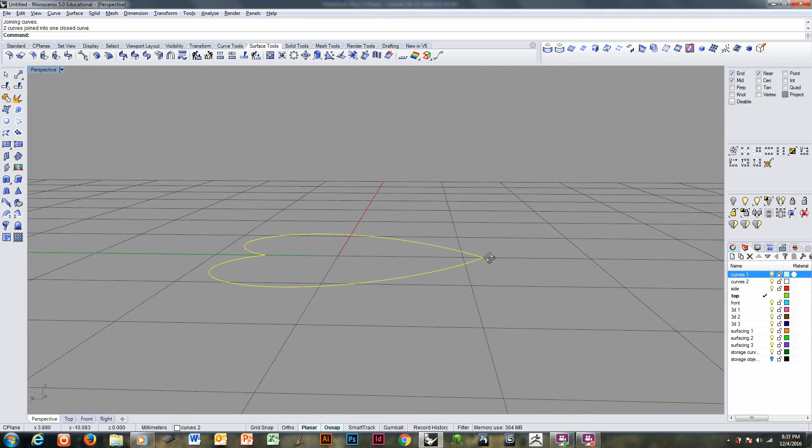We've been talking about doing organic modeling with a top and sides approach. I'm going to show you an approach to doing a puffed heart, something that is notoriously difficult to achieve well in Rhino.

Here's a basic drawing of a heart. I'm going to break this drawing down so that I have two rails that I can use to make a surface that I can then modify as the top part of this heart. But before I do that, I need to draw a front and side view of what I want. It's always wise to do.

The easiest way to get an accurate construction line here would be to do a line tangent to two curves. I could just mirror that, but might as well come over here and do it this way, and then one to the right here, with the same approach.

For a bottom construction line, I can just pull off the points of the heart. These will allow me to draw a top and side view, the end and side view of my heart.

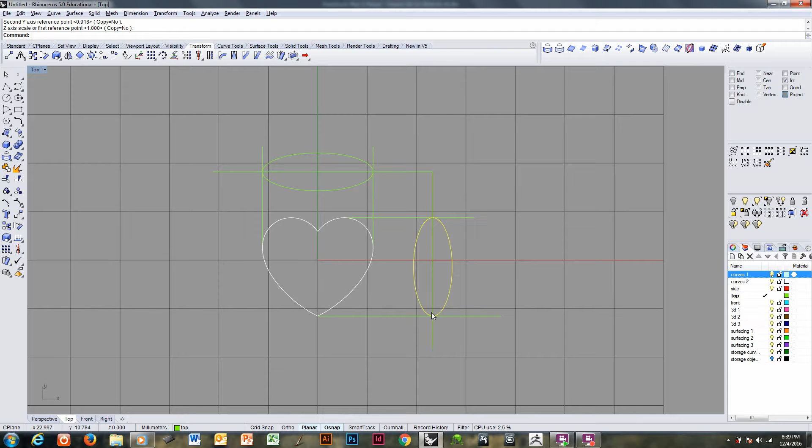So I will move that view into position and rotate it appropriately, and same thing here. Actually, I'll just rotate it where it is, and then I'll project it to the front C-plane. Front C-plane, project. There. So I have my front view and my side view.

I'll add a little more information to that as I go along, but for now that'll do. Go ahead and turn those views off. I want to copy this, paste it, and put it on my storage layer in case I need to get that exact pristine heart back later.

Now I'm going to chop this up a bit. I want to take this curve as far as I can, but once I get much beyond here, if you can picture this extending, I start to come back into a point very quickly. So that's about as far as I can go.

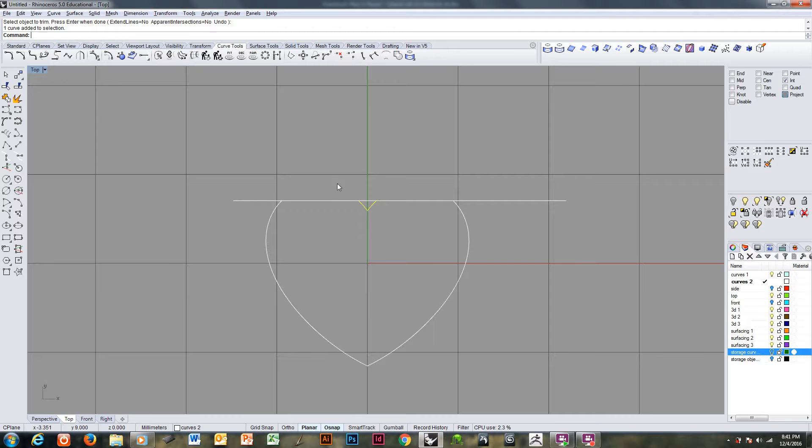So I'll copy this again. I'm going to trim this off, and then I'll move this down to the point. That's a pretty good position for the point. I'll trim the point off.

I'm going to paste that drawing back in, going to extend by arc to point. Just something up this direction is fine. Going to rebuild this curve. I'd say 24 points would be fine.

Mirror it over. I don't need this to go really much beyond the end of the heart, so I'll trim those off. There. Okay, this is the curve for my surface. Those are the curves for my surfacing work.

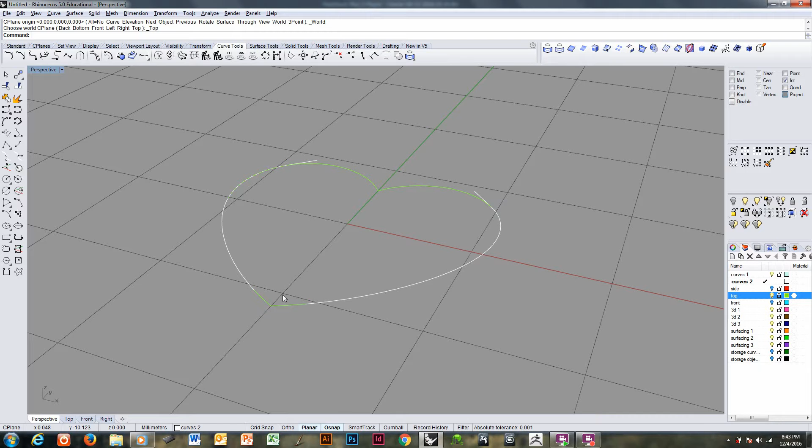Now I mentioned that I might need to do more in terms of the views. As a heart comes down to a point, you have a cleft here and a point here. These are really important to the nature of a heart. And wherever you have a point in a 3D model, in a view, you have a crease.

This is going to be a puffed heart. I'd like to have as little creasing as possible. So when you think of a point in three-dimensional form, if you don't want to crease, you basically have to create a cone. Think of a stone pavilion, okay?

Think of this as being the front view of a faceted stone's pavilion here. Here would be your girdle, here would be your crown, okay? That would be your girdle, okay? That culet can come down to a nice point.

If, however, this is an emerald cut stone, okay, so you have a lengthwise extension here, you can't have a point anymore. That's why emerald cuts have a linear culet at the bottom of them, like this.

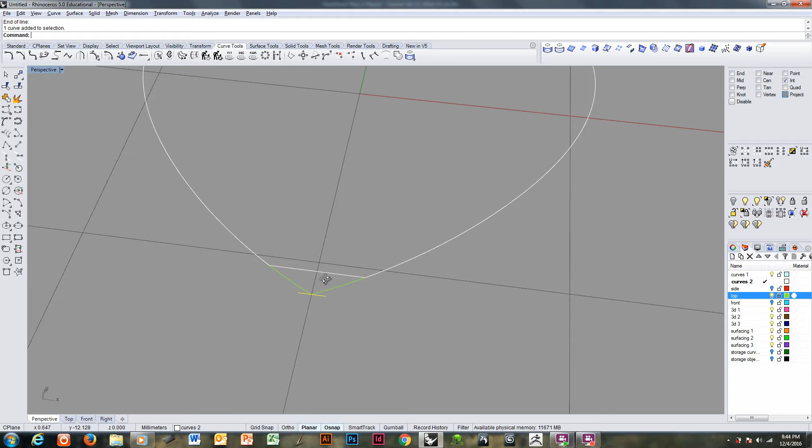Okay, so for us to be able to come down to a natural point, we're going to want a circle or something very close to a circle as a cross-section on our heart here. So I will draw that now.

Okay, so by the time I come down to the end of my heart, at this point I want to have a cross-section, something like that. I can have more of an oval, because as you know you can pull an oval cross-section also down to a point.

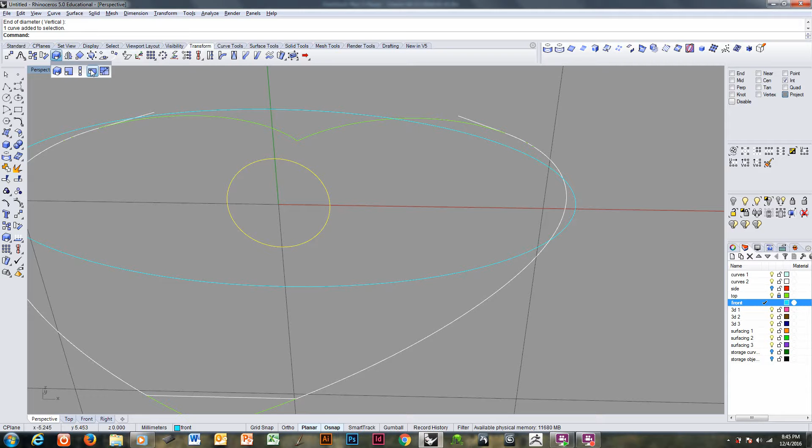But it can't be cushioned, it can't be squared at all. I'm going to go ahead and do a non-uniform scale of this, with a copy option being yes. If I make it like this, I'm not going to be able to pull to a point, it's going to be a crease. That would be about the most I could do in an oval that would not give me a crease at the bottom. So I'll leave both of those curves there as reference in my front view.

And I'm ready now to surface. I don't need to do a bi-rail sweep in this case because these two flat curves side by side are going to give me straight sections no matter what I do. Like so.

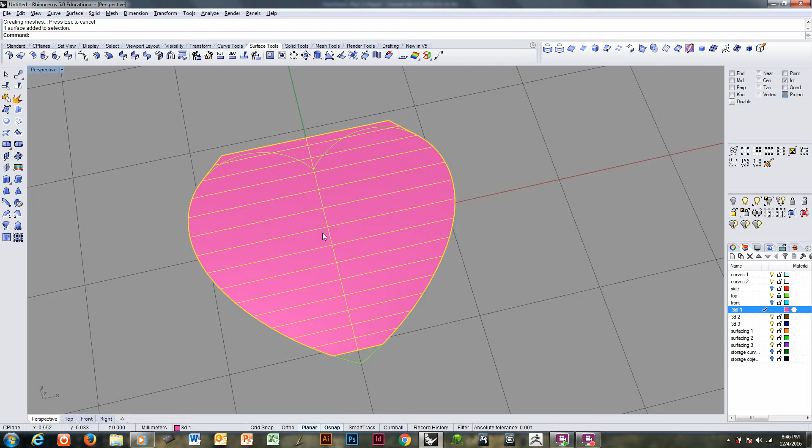I want to rebuild that so that it's a good surface for me to sculpt with. Right now it has 18 going in this direction. I can tell because it's the larger number, it's certainly not the 4, it's the 18. 16 should be good.

7 across the top, yeah, that's fine. 7 going this way, always want an odd number so that I have a center line. 3 is a good degree of mathematics here in the surface. Like I said before, I prefer 4 for curves, but Rhino's standard of 3 for surfaces is fine.

And that's the surface I'm going to sculpt with. At this point, I'm going to go ahead and turn off that green layer for a moment and start to sculpt. I'm going to begin in the front view, no real reason why, just as easy as not. Going to move this piece up to the front view.

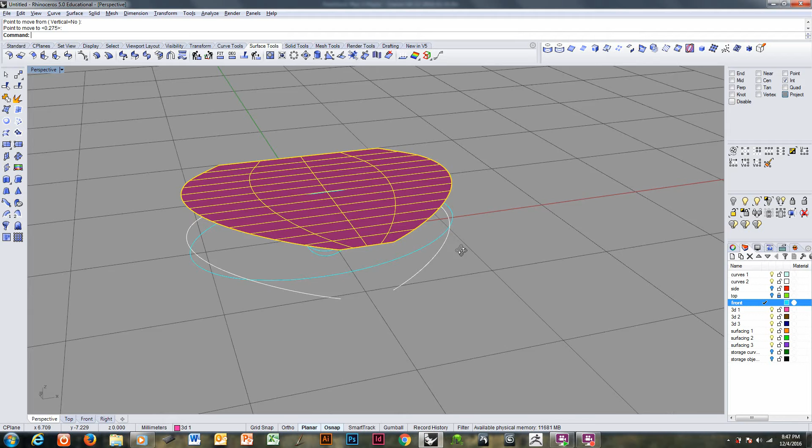Till it approximates that oval. I don't have to be precise. Turn on the points and begin to sculpt. I have this set up for point editing over here, so I do have my object snaps on top, and my point selection and visibility toolbars below that, and my layers and properties panel below that.

I'm going to go ahead and select everything but the center line here, and hit the wrong direction. It's always the first time to figure out which way Rhino's decided to throw these points. That way's fine. And I'm going to move down.

Okay, first thing you're going to notice is that the whole surface pulls away from my curve. That's fine, I'm not concerned at this point with that.

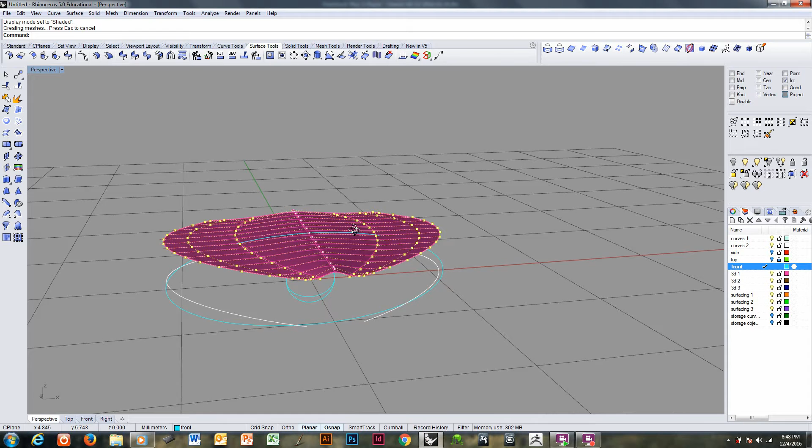Going to grab the outside 2 rows of points, do the same thing with them. And I'm just trying to keep my surface somewhat parallel to what's going on here. Last outside row by itself. Okay, I don't want to go crazy. This is fine.

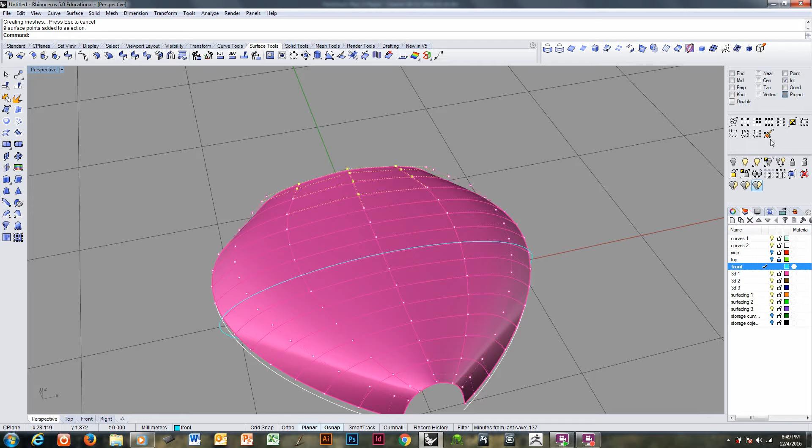And now I'm going to bring some of the other point information up again, mainly these center 3 rows. Just to get an outline that is pretty much consistent. I'm not being crazy about it, I'm just gesturing it in. Okay?

So I've created something that approximates that view from the front.

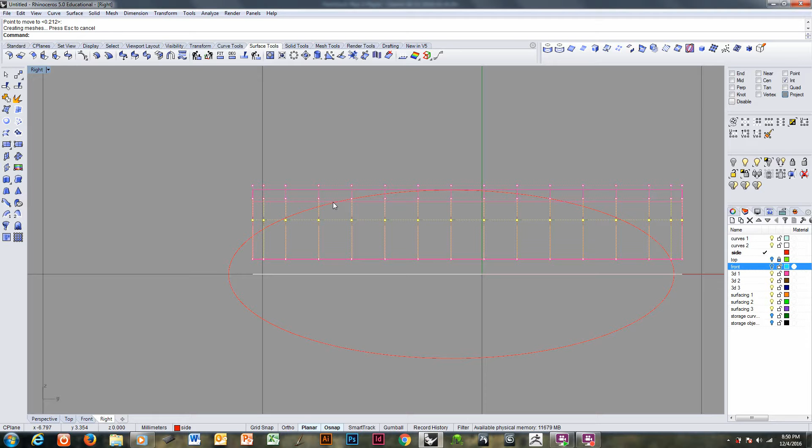Now, my right view is going to be hard to see. When I go into the right view, if I stay in point editing, it's fine. But if I go shaded, that curve is going to disappear.

Since I know I'm viewing it from the right, I'm going to move this curve with grid snap out beyond my model so that it will... okay, other side, that's fine. I moved it the wrong direction. So that it remains visible to me. That's right, I'm looking from the right, so there. So it remains visible no matter what.

Then I'll lock it and start manipulating control points from this side. Actually, I'll do one side at a time. This is the row that's already pretty much at the top.

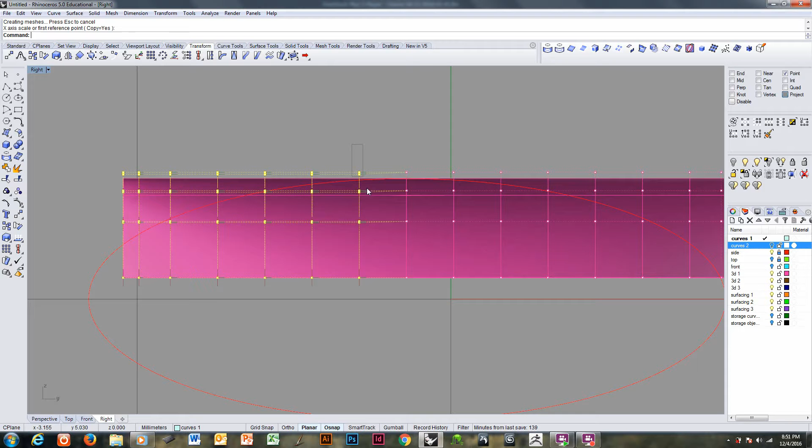And I have 2 choices. I can either move these down, but I want to keep the bottom line straight. So what I'm going to do instead is non-uniform scale, always picking at the bottom point, or 0 - either one would be fine. I don't want grid snap anymore. I don't want copy yes anymore as an option, so I'm going to remove that right away.

And it will take a few passes, because remember what you're doing here - these points are magnets, the surface doesn't pass right through the points. So I'll come all the way through, approximate it from what I can see, and then come back and try to be more precise. And it really doesn't take very long.

And now I'll do the other side. It's the same thing, just non-uniform scale.

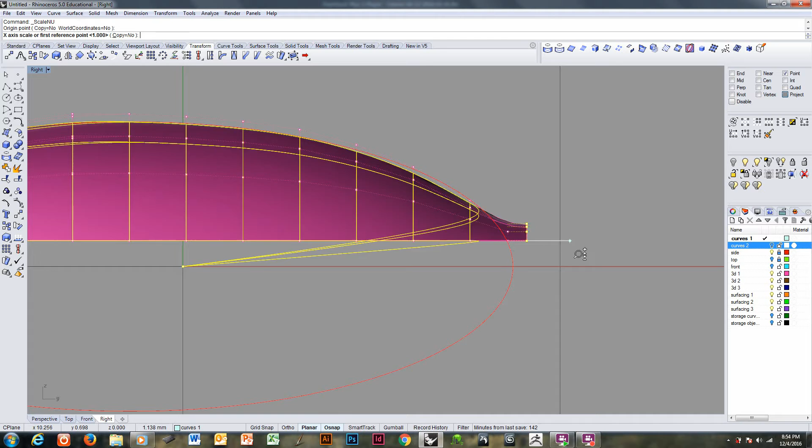Obviously these two rows are beyond the end of that oval, so I'm not going to worry about getting them to match the oval. Just that I have a nice graduation as it comes down.

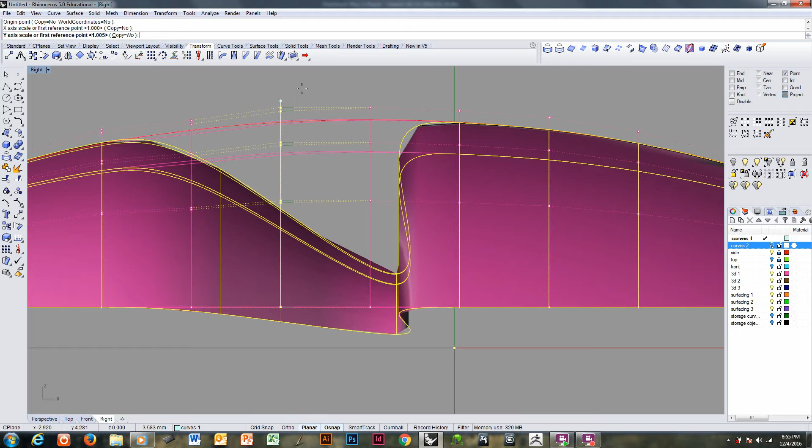Make any last minute adjustments. And what I've done is I've created a simple dome.

Out of that surface. Now I do want to check at the end here and see that this has retained a simple oval shape. It should have.

Oh, interesting, I have two surfaces in the same place. That's because at one point I did that non-uniform scale with a copy option on. Alright, that's important because that means I'm going to have an inaccuracy in my work. This won't have happened to you at home because you didn't have the copy option set on your non-uniform scale. I did, and it caused at one point for me to create a duplicate surface.

Make sure that this surface is the one I want. That's fine. I want to come into that front view now.

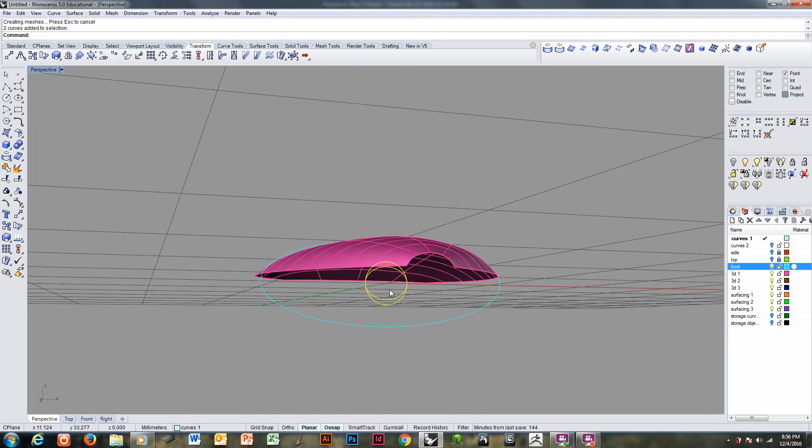And the same way that I moved the right view curve out of my way so I could see it, I'm going to do the same thing here. I'm going to grab these two points—I have two curves, actually all three—and move them down in front of the piece so that when I'm in the front viewport they remain visible to me. Okay.

And I can see, okay, it's a little bit in between these two, which is fine. That's what I wanted to see. So that's good, that's good.

Well, what I want to do now is bring back my original curve. I want to offset this because that's my top, but my top for one thing doesn't incorporate the full heart, and for another it isn't going to be my final sides of the piece. So I'm going to offset curve, and I want a good healthy offset.

The thicker my offset, the softer my doming of my heart is going to be. When I start to get very bad distortion down here in the middle, I know I don't want that. So somewhere in this vicinity is good.

I don't care for the quality here. I'm going to explode it, and I'm going to extend by arc to point to get myself something softer. I'm going to copy this first though, because I'm going to have another option I want to explore in a minute. So extend by arc to point—just anything that's nicer than that.

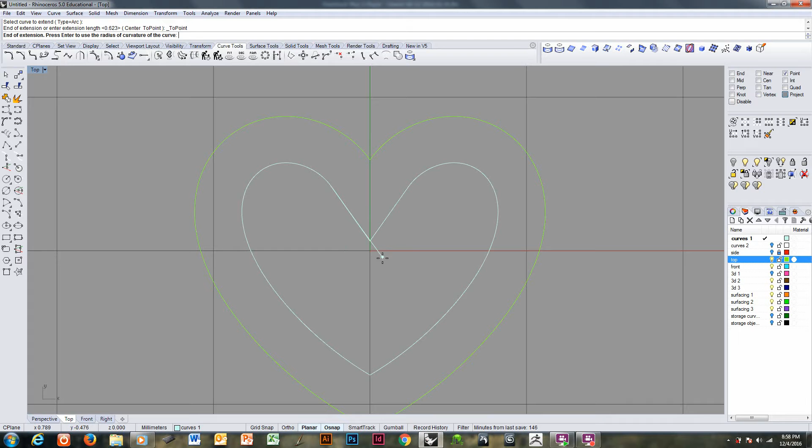Okay, it's not going to give me anything nicer right now, so I'm going to join those together and rebuild it. I'm going to rebuild that to like 14 points.

Turn curvature graph on. Turn on points. I'm going to go ahead and let this soften up a little bit. I don't want to create a strange tightness in here, so I'm not going to let it get as pretty as it could have.

To make it really pretty, I would swoop it, but that swooping would create a pinch in here that for surfacing is not a great idea. Remember, Rhino doesn't like tight spaces, so creating in that tight space would be a bad idea. But that's certainly prettier than the two curves I have here.

Mirror it over and join them together. Okay, that's one option.

The other option, I'm going to paste these back in, is to do a blend curve. Okay, and this will allow to alleviate some of the creasing in here. I don't care for the orientation of how that's working though, so I'm going to delete it.

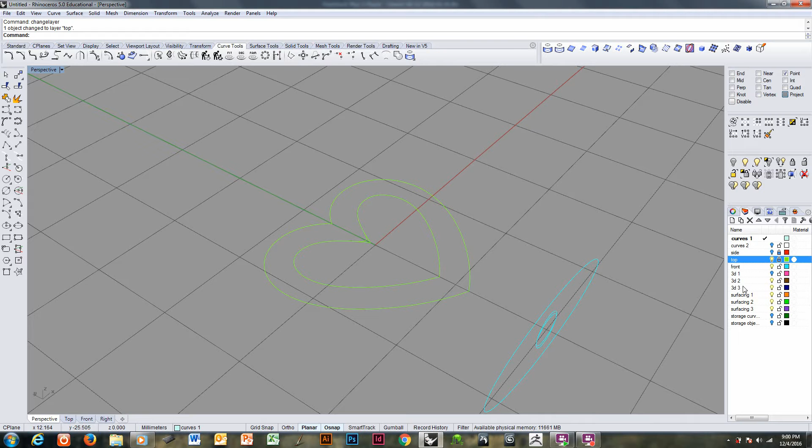Okay, so I have that. I'm going to bring back my surface. I'm going to take the curve with the point. Oh, they're locked—didn't mean to. Now they're turned off. There we go.

Take this curve. I'm going to project it with history onto the surface. I do not want to delete the input, because otherwise history won't follow. So I have that. Next thing I'm going to do is extrude straight down from the edge of this surface.

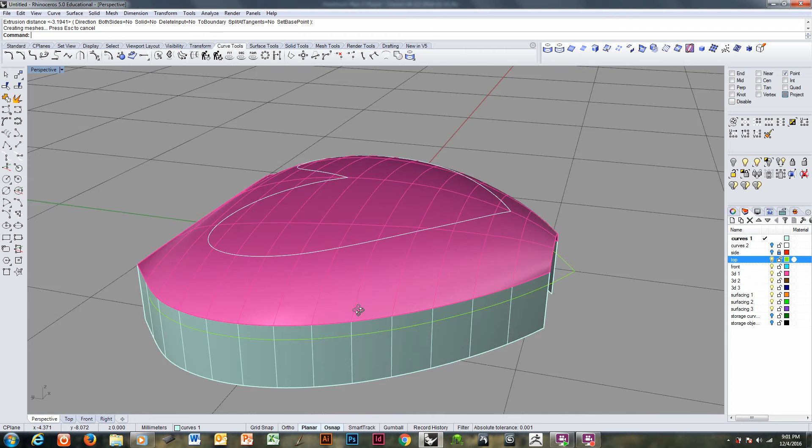And I'll extrude it well below the... I could have extruded them both at once. That would have been fine as well. I need, however, for the tops of these two surfaces to be even with the C-plane, because I'm going to flip this. I'm going to mirror it from side to side, up and down, to create the back side of the puffed heart.

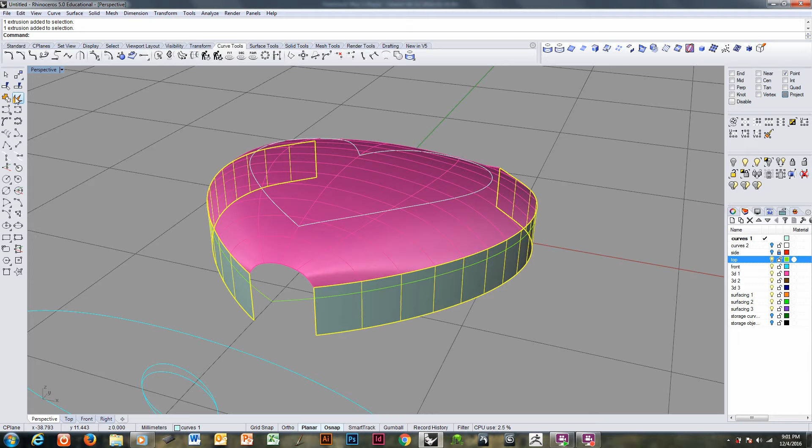To get those to the construction plane, I'm going to turn on the control points. I got an inaccurate read on those because it's still, these are extrusions, and in Rhino 5 you have to explode your extrusions to access the sub-object level of your surfaces, the control points.

I'm going to select a point at the top of each one. Take a guess as to which one works. That's the right one. Good. And project to C-plane. C enter, Y enter, using our class shortcuts.

Okay. I am going to do match to pull this down and finish up the surface, but before I do, I want to lock in what I have here sculpturally. And to do that, I'm going to insert a knot.

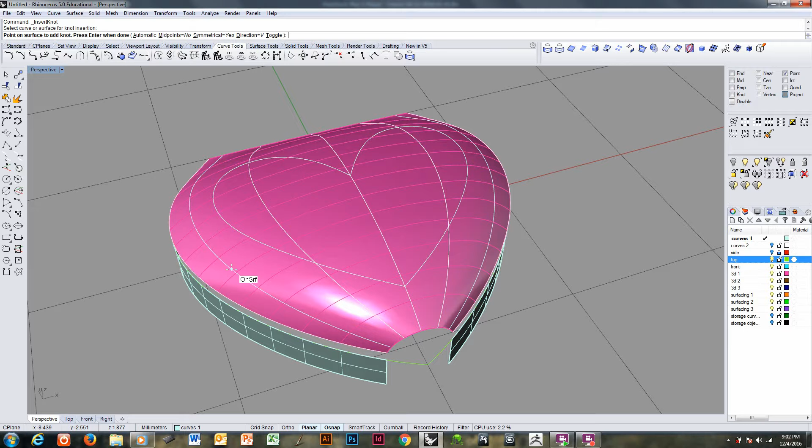Edit menu, control point, insert knot. I want symmetrical, and I'm going to add a knot out here towards the side and a knot in towards the center, symmetrically. That gives this surface more control points so that it'll have less of an... remember how tangency works, class.

Its tangency is going to move on a 3rd degree surface, it'll move 1 point away. Curvature will move 2 points away, affecting them. So it's already going to move this point down to match, and then it's going to take the second point and adjust it so that the smoothness, the tangency, remains.

That point will actually be exactly above this first point perpendicularly. So, and it can actually affect the third point over. I don't want anything to happen to this area. So by adding the extra points, I've locked this up so it can't be as easily distorted.

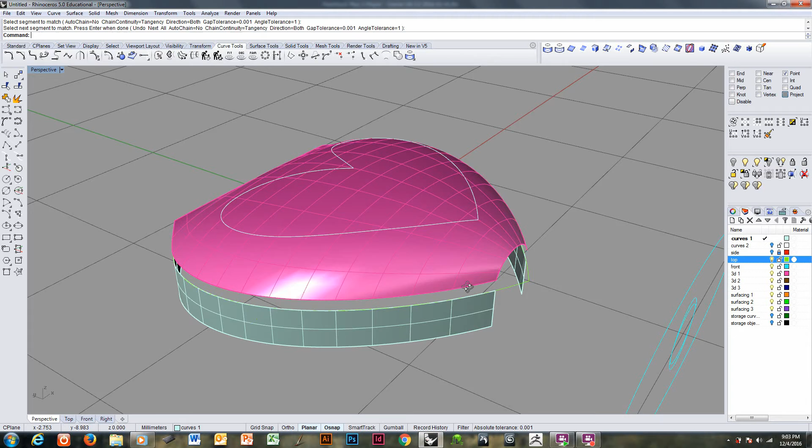Surface, edit tools, match. Okay. And there we go, I've set it to tangency. That's fine. I'm going to look and see how it affected the top.

Very little, because I added those extra points in. Very good. Repeat the command. Okay. So I've now brought that into play.

I'm going to turn on the points. Almost always you have to adjust the second row of points up. You can see how tight they are against the surface. That's pretty useless to us. And it's going to really mess with this staying connected to our oval cross section.

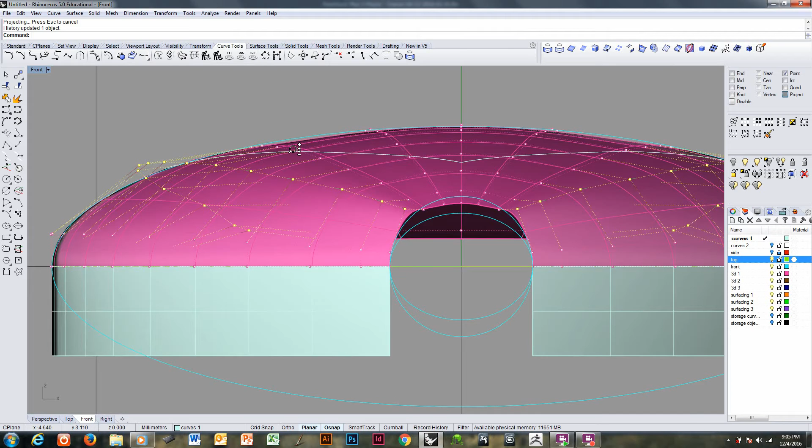So I'm going to bring it up. Going to grab the next set over. Going to move them up. Just adjusting because that match command does mess with things a little bit. Changes things. Next set of points in. And next set of points in. Looks good.

Okay. Now I'm going to look at this end cross section, and you can see that it doesn't look great. So I'm going to grab those 2 points and bring them down. And remember, we discovered that it was about halfway in between there, so we're going to allow that to continue to be the case. I need that nice kind of oval, circular effect here on this cross section.

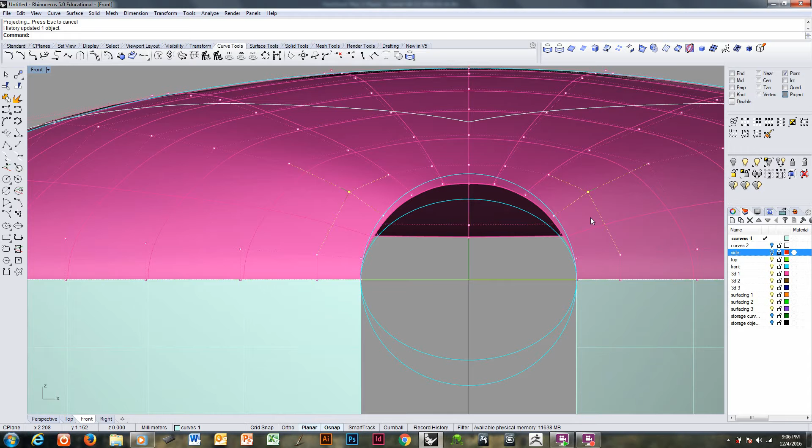I'm going to do it here as well, so that the points are radiating in a smooth way. And out here as well. You can see the isocurve wire. You want it to have a fairly rounded appearance. That looks good.

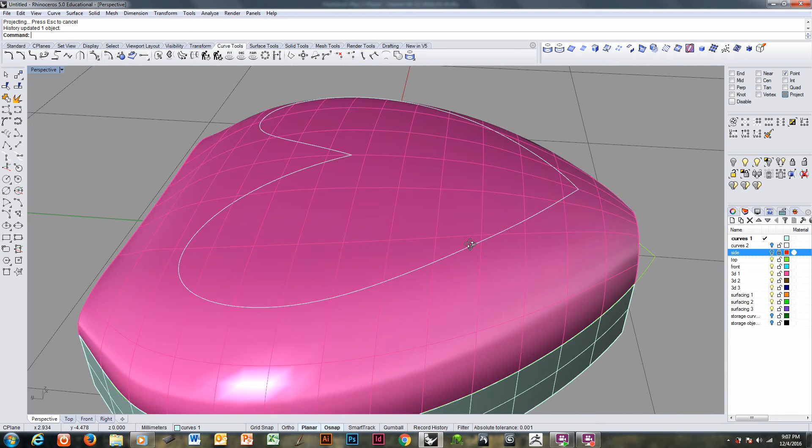Okay, so I have that. I'm going to copy this, paste it to my clipboard, put it on storage, paste it from my clipboard, I should say, so I have what I want. My next step is going to be to create the back side of the heart, which will require some special surfacing.

So I'm going to come here and take a look. I believe that I want to cut it. Well, I've got to have that surface in place. I start to vary right here, so it can't go farther than that. I'm going to say here. And I'm actually going to explode this. Hide this for now. So I can take a curve perpendicular off the end here.

I use the from first point option by hitting Enter to get it to start directly from the end of my curve. Line perpendicular from curve, start of line, the end here. That's why I got rid of the other curve, because it would have become confused as to which curve it was trying to look at. Now it wants me to pick where it starts and ends, but I want it to go from its first point.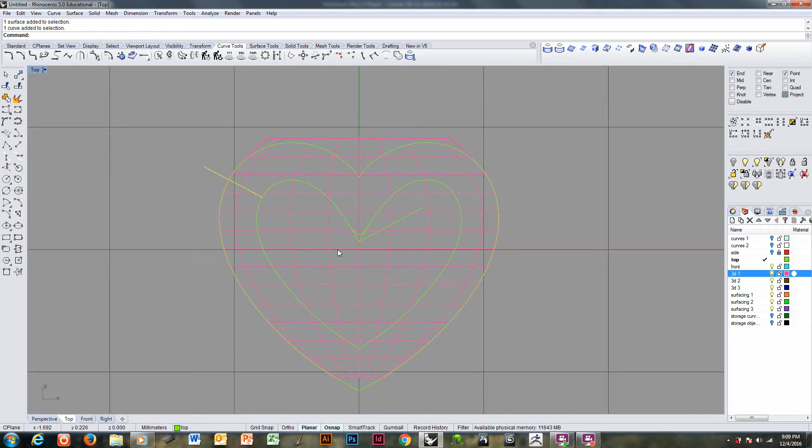Remember, you have to be in an orthographic view for this to work. You can't choose that option in a perspective viewport. I'll put this curve back, and I will mirror this over. And now we're ready.

I'm going to split this surface with that center heart form. I'm going to trim it by making extrusions, both side option, from these curves, and then trim off the extrusions.

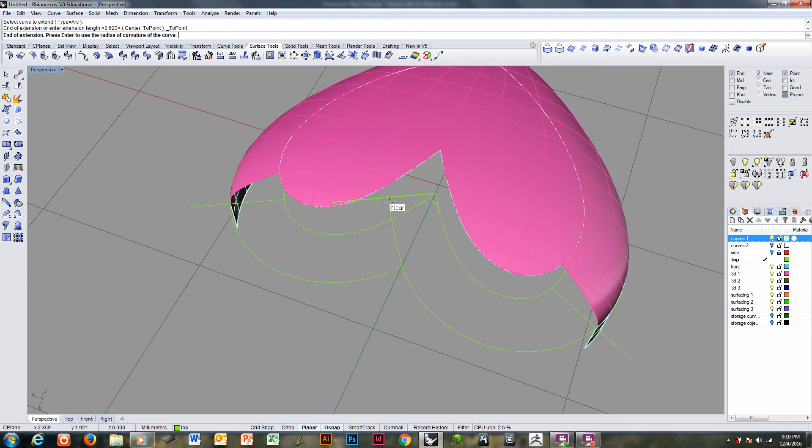I'm going to extend the top here. Near snap, till it grabs onto that surface, that line.

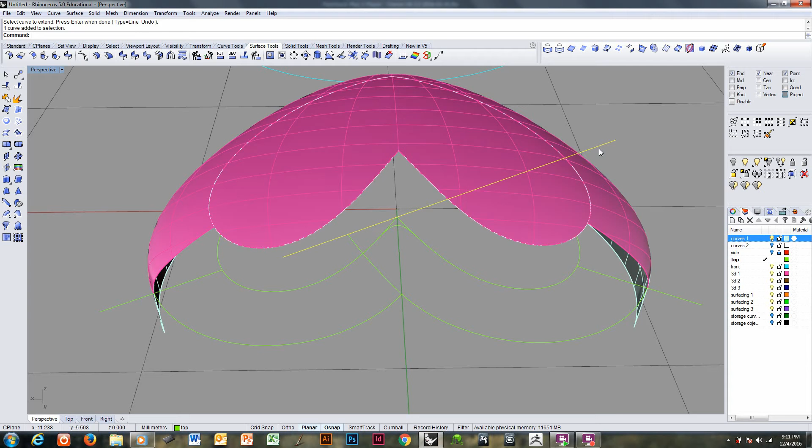Going to need to extend this a little bit out that way, so extend it by line. I'll just extend it all the way out. Project it onto here.

Draw a line straight down from the end to project off. Going to trim off the end of this projected curve so I have everything I need to get a cross section.

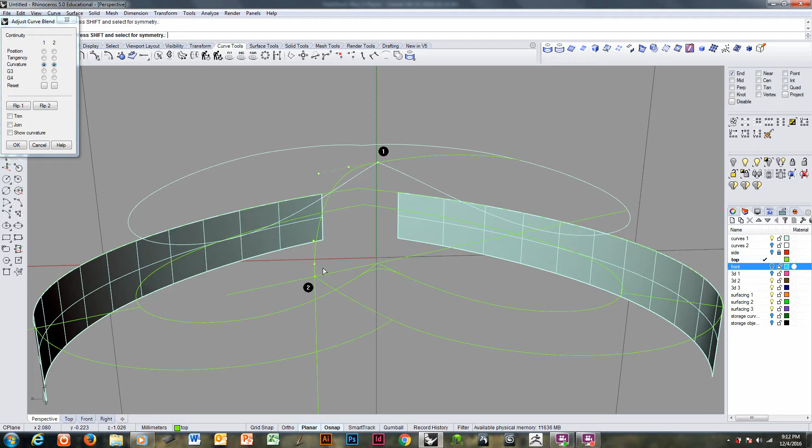I'm going to be doing a swept surface for the side here. Remember, when you make your cross sections, think about what you're doing. I like to keep this fairly low to the bottom if I'm looking for a very smooth rounded effect from the ground, if I don't want a real strong sidewall or flatness. And I get the rest of my roundness or fullness by adjusting the other points.

That's my first cross section. I already have my second cross section here. I need to split this curve, and I need to extrude it to match both sides of that curve.

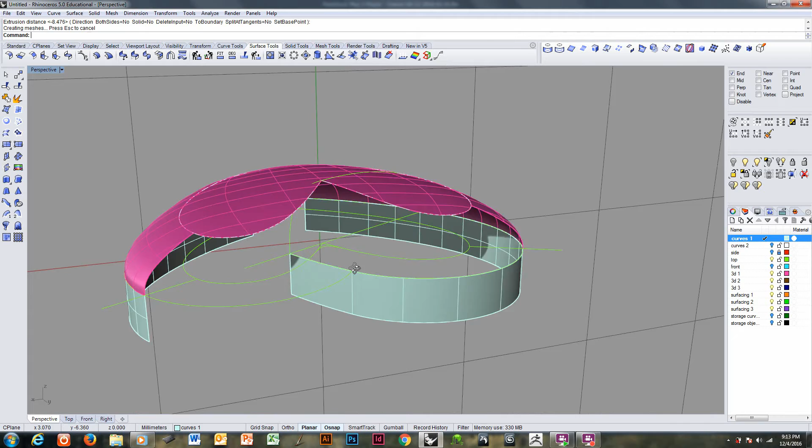Having done that, I can do my first test surface. Join these together and do my very first test sweep from Curve Network: edge rail, edge rail, edge section, curve section. I should have tangency here, here, and here. So 3 out of 4 should give me tangency, which I have.

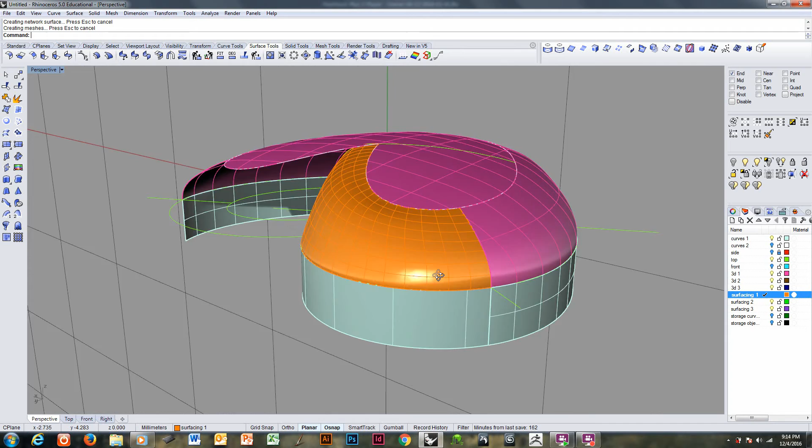I'm going to look at what I've gotten. You'll notice right away that it comes off nicely here, but almost right away it begins to sink and get soft. That's not what I want, but it was expected. It doesn't surprise me at all.

Turn on near snap. I'm going to make a cutting plane here. Project, grab an edge here, just like I was doing adding sections to a bi-rail sweep. Same thing, I want it perpendicular to both edges.

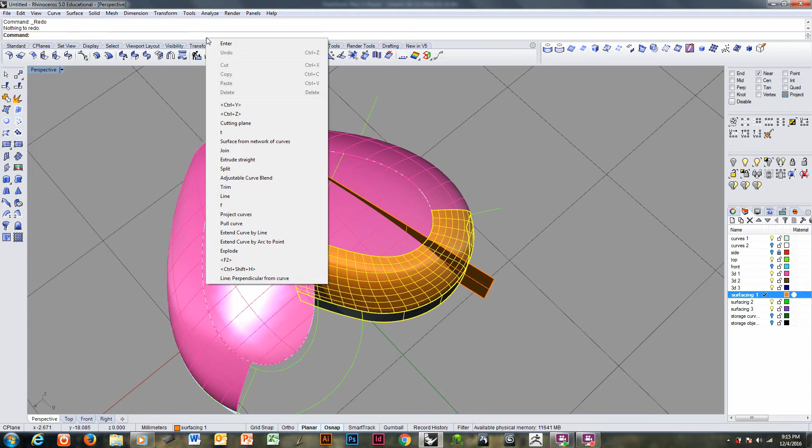Actually, I don't care for that one. Cutting plane. I want a nice, strong, perpendicular feeling. There, so I have those two.

Go ahead and get my intersecting curves. Pick a color I haven't been using that I'll see clearly. I've got to be careful, because if I intersect all of these separately, I'll get edges. So I'm going to join them together first, even though I know that at the end of the day it's not what I want.

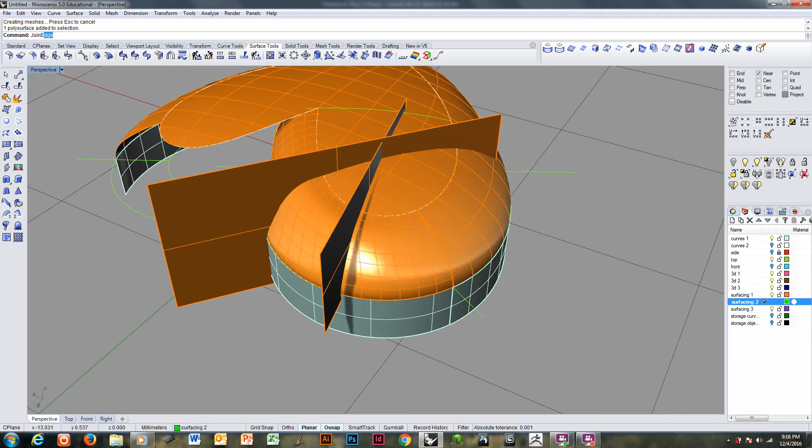Rhino doesn't want to join that bottom edge, so I'll force it. Alright, just for the purpose of doing an intersection. Done. I'll hide these two, and I'll explode that solid to extract surfaces, to get these back where they were.

Okay, you can see how bad that cross section is. So I'm going to bring back that section I used to make that with the cutting plane, set a C-plane to it, hide it again.

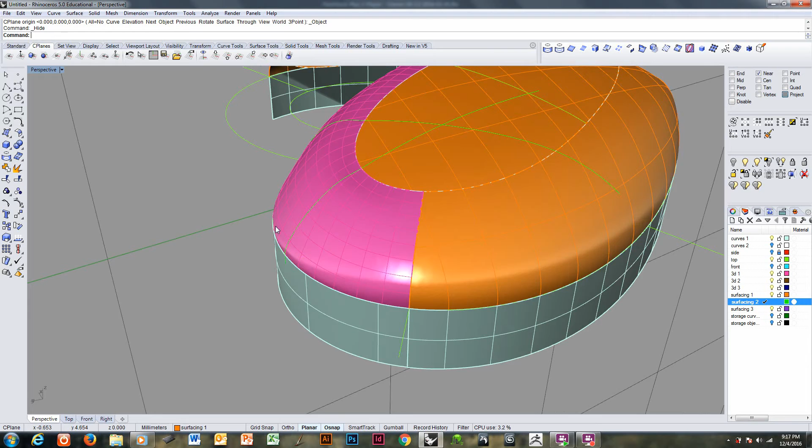And I'm going to do a blend curve from here to here. Actually, those are joined together. I don't want that—explode it, and then do it again. You can see the difference of what I'm getting.

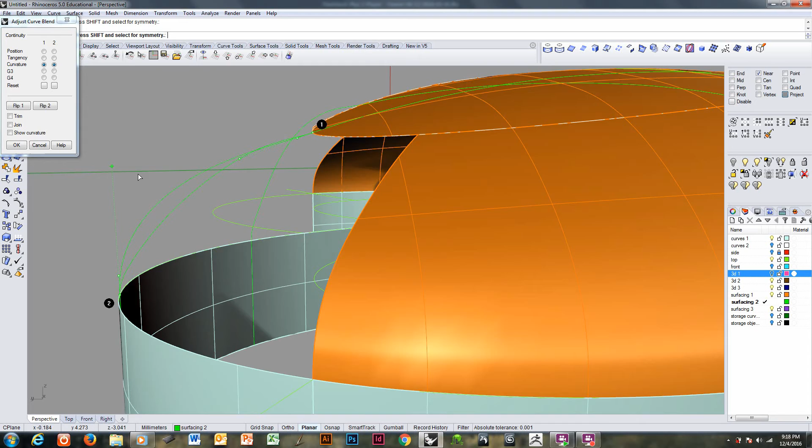And I want something much more rounded and soft, like that.

Next section, explode it. Unhide its cutting plane, set the C-plane to it, rehide the cutting plane. Adjustable blend curve. Same thing, I want a soft, rounded section.

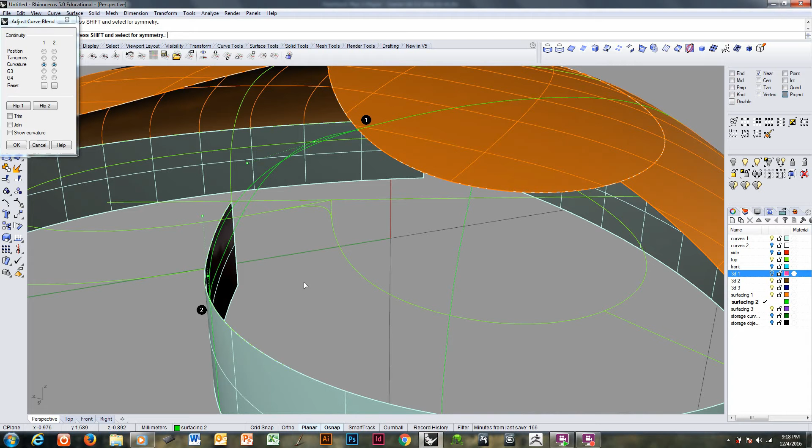Okay, that'll work. So, try to surface it again: edge rail, edge rail, edge section, curve section, curve section, curve section.

Now I only have tangency on two sides, and that doesn't make sense to me. So that means I selected that curve instead of that edge. Surface from network of curves: surface edge rail, surface edge rail, surface edge section, curve section, curve section, curve section.

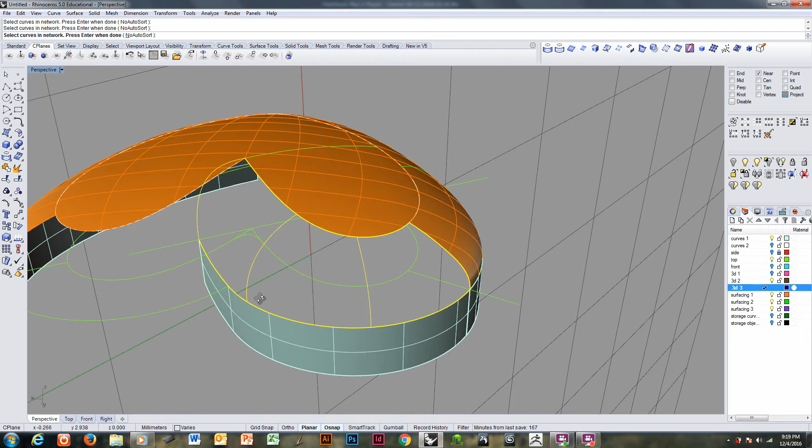It's important that you predict when you're doing this how many points of tangency you think you're going to have, so that if you don't get it, you can check. There's my 3, and that is a much more attractive surface.

I'm going to mirror both of these over, like so. And I'm going to trim them off of each other. I really don't need the extrusions on the bottom—the extrusions on the bottom will not be part of the finished piece.

Okay, that isn't terrible, but you'll see that I have a very clear cleft there.

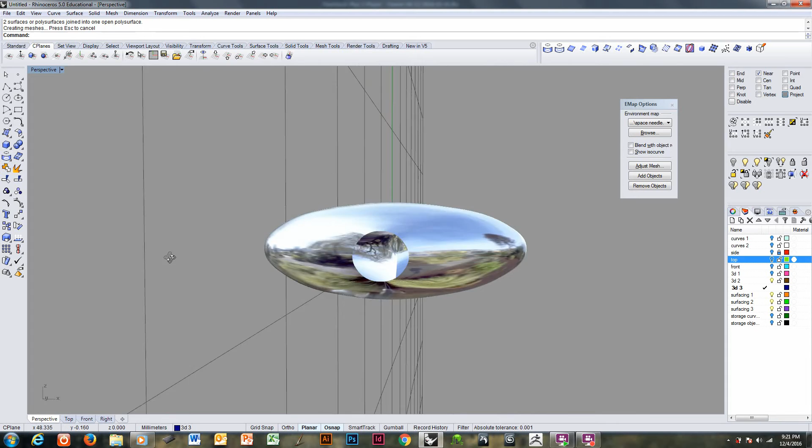If I join the top and bottom together, I do have that nice oval hole at the end. It's very soft. But there's that crease that I told you I would get. It ends abruptly here, but still, you have to decide if that's okay with you.

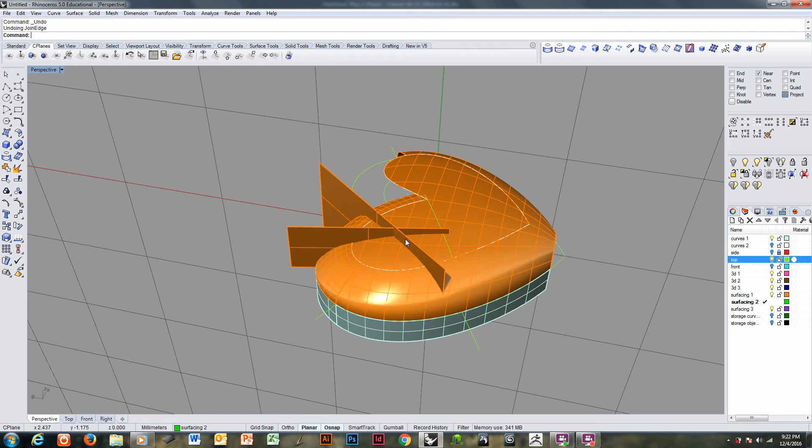If it's not, then we have to make some changes. So I will copy this to clipboard and undo. Go back a ways, be going back quite a ways, paste it back in and put it in storage so we can look at it as a comparison later.

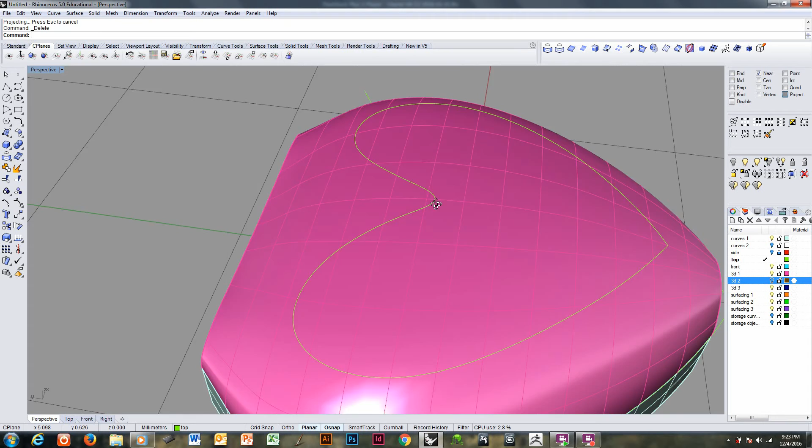So, to reduce that, I can project this curve instead. Oh yeah, project is C-plane dependent, class. Make sure you have the top C-plane if you want to project from the top C-plane. Okay, otherwise the process remains very much the same.

Split the top, trim away the extrusions, and join back together. Okay, with this scenario, I will have a cross-section coming straight off the center.

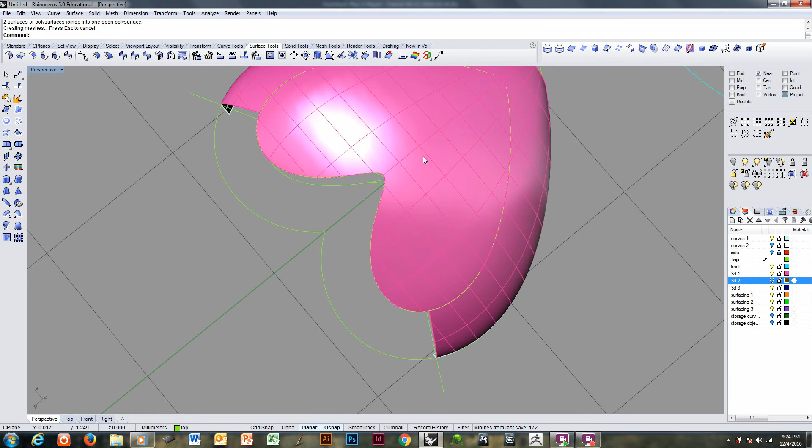So now, extract isocurve, and snap will catch right at the end here. And you need to have a curve running straight down, and a blend curve between the two.

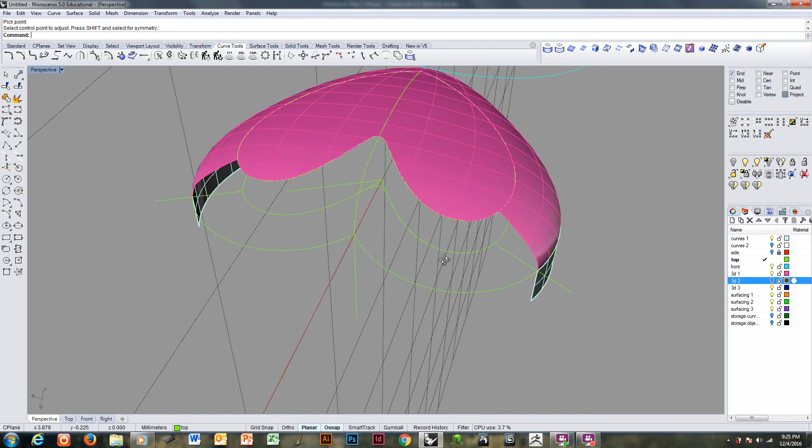And once again, I'm going to bring it down quite low at the bottom so I can get a nice roundedness coming across. That's fine, I already know that I will have real trouble if I try and do this without additional cross sections, so I'm going to go ahead and set them up just as I did before. Near snap, project, cutting plane. Actually, do I have my old cutting planes in here? No, I don't. Good, just don't want to get confused.

So, cutting plane. Actually, it would be helpful to do my extrusion first, so I'm going to split that outline. Do that bottom extrusion. One side. Might as well make it the same length. There, and now I'll go ahead and join these together, just so they're easy to select and work with.

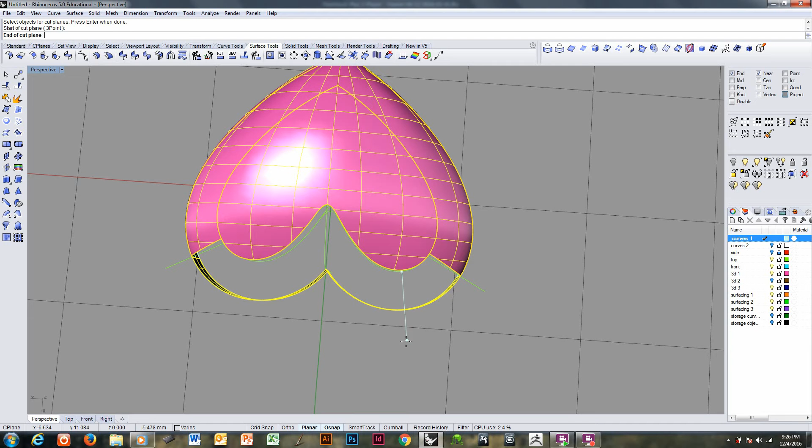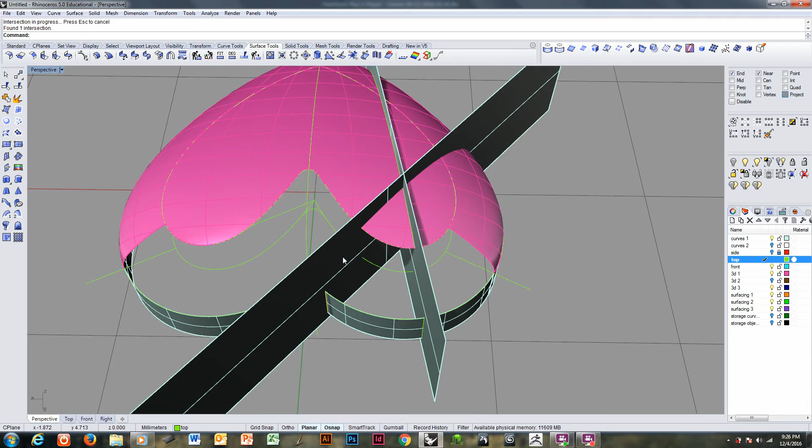Okay, cutting plane. Near snap, project. I want to capture the end here, and I want to capture here, and I want to get my intersections between these two, between these two, between these two, between these two. Hide those for now.

Blend curve, adjustable blend curve. And there once again is that very steep slant, which I don't want. I'll bring that low, I'll bring that high. If I don't want object snap, I just hold down the Alt key. I'll tug that back, bring that out. I like that, that's pretty good. There's actually a little bit of a sink there. I don't want it to swoop upward. Okay.

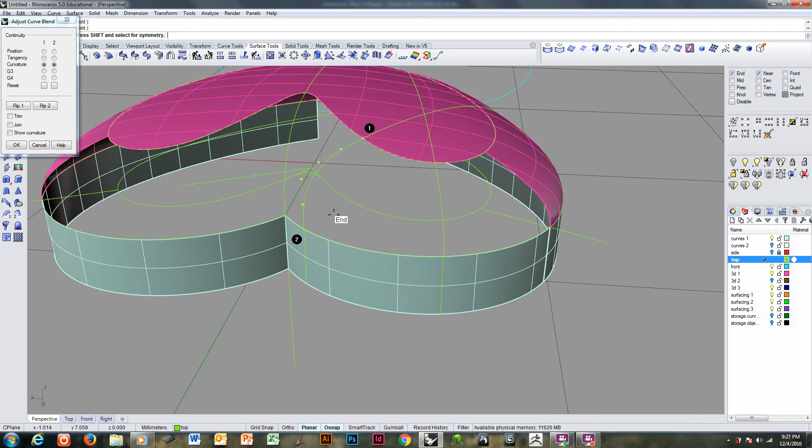Alright, and then the next section, same general recipe: low here, fill in, take a look at what I have, and accept it. I can delete all the leading curves that I used to make my blends with.

And the last thing I need to do is I need to split this edge, because I'm going to end the lofted surface or the swept surface right here. Split edge, right there.

So, surface and curve network. Edge rail, right to where I split it. Edge section, curve section, curve section, curve section, tangency on three sides. There's a little bit of a ripple there.

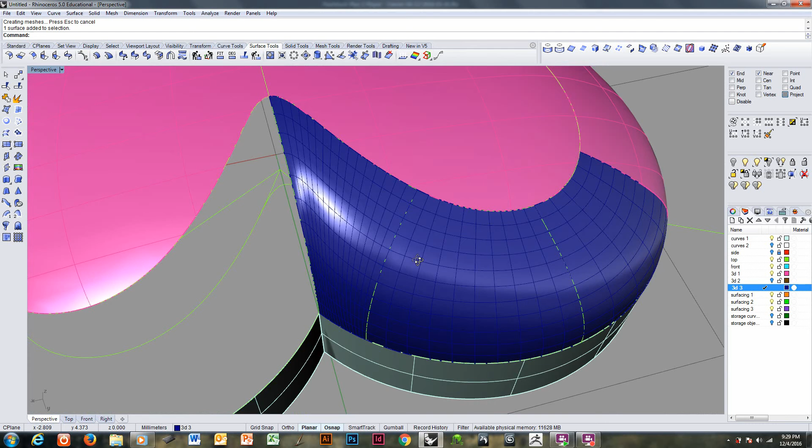That I'm not in love with, but we'll see what happens. Yeah, there's a definite buckling in the surface right there that I don't like. So I'm going to copy these to clipboard and undo that edge splitting. Actually, I was afraid they would get deleted, so I copied them. I didn't need to, they're still there. Mirror them over, I'm going to sweep.

Oh, I can't. Okay, yes I can. I'm just testing to see if it'll work for me. I'm going to use the curve instead of the surface edge. That won't give me tangency.

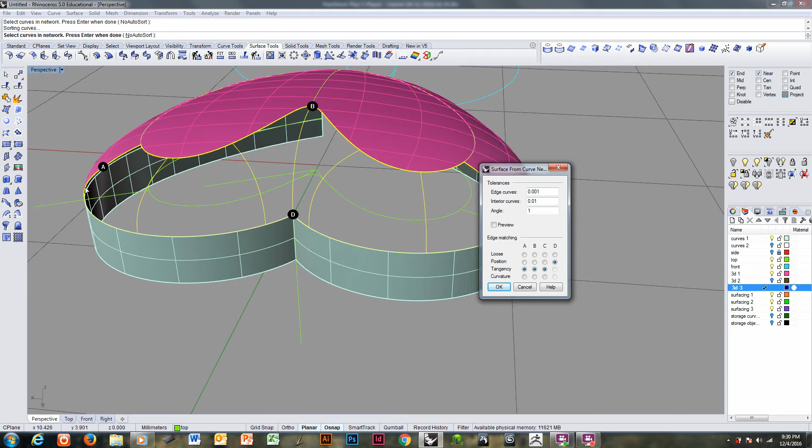Edge, rail, edge section, curve section, curve section, curve section, curve section, curve section, edge section. That'll have tangency on two fronts. Well, actually it gave me on three, I'm not sure how. Oh, 1, 2, and 3. Okay. I got the same buckle, and I have less of a flow, so that's not acceptable to me.

So I'm going to go back to how I did it before. My challenge is, class, that this is forcing too much, this cross section, so I'll try it without using that cross section. I have to split that edge again. I'm sorry, I undid the split, I gotta put it back in.

I want to be able to use that surface edge if at all possible, which I can, so I get a good flow. Edge section, curve section. I'm going to skip this section that I made and go straight to the center. That is better. Mirror it over. Now,

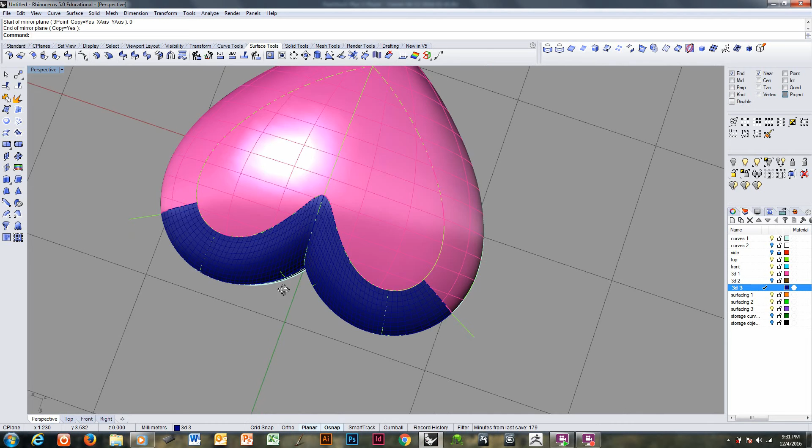That should give me a very different effect from the last heart. Join these together. Mirror. Join together.

EMap. Okay. You still have a little bit of tension in the surface through here, but it's much softer than you would have gotten from the other.

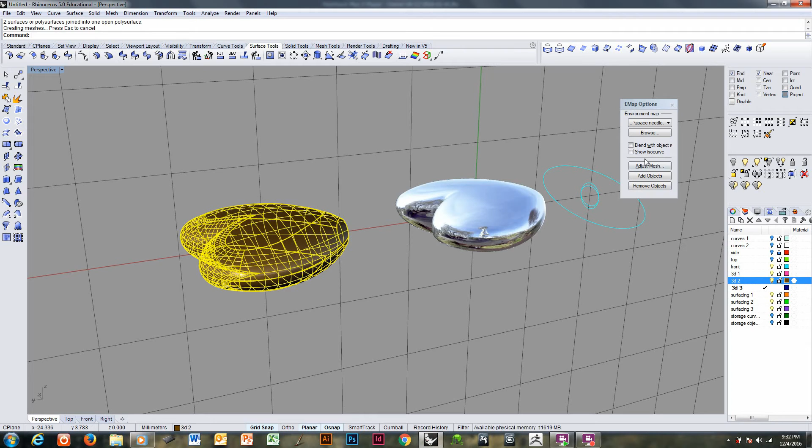And this ripple that we have right here is because I don't have that cross-section in place that would help it read better. That's kind of a challenge I would have to deal with, how I would resolve that through there. Because it is simply, as this came off of here, you can see the ripple right there.

I want to end this video, but to solve that problem, here is what I would need to do. I would need to have a cross-section that comes off of here.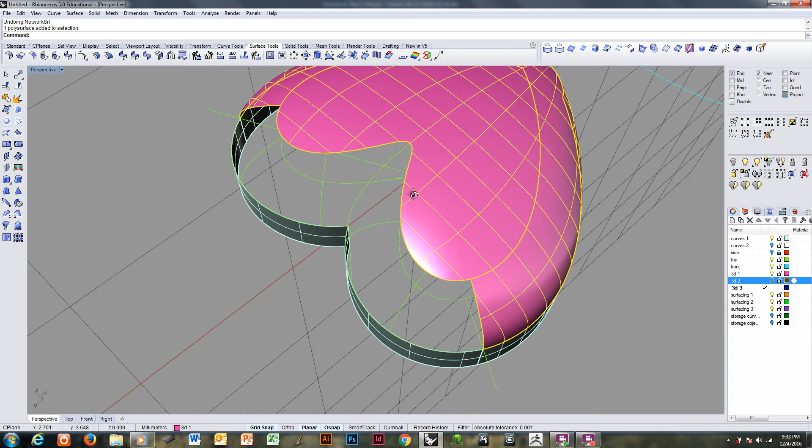I'll actually borrow one of the ISO curves. I actually like having a straight cross-section whenever I can, a planar cross-section. So actually I'm going to do a surface cutting plane.

Just take the end of that, pull straight, delete that, and get an intersection here, intersection here, throw that away, and get a blend.

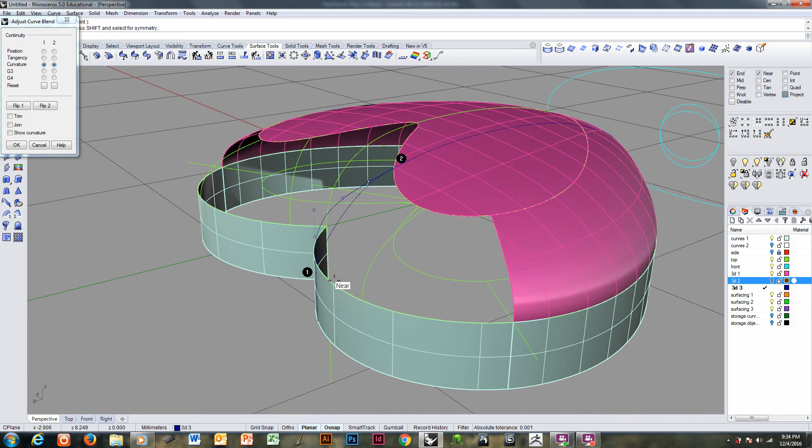This is the truth behind swept surfacing, guys, is that you have to play until you get what you want. Don't ever have grid snap on when you're trying to control handles or anything, really. It's too strong of a...

And this is what I'm really watching. I want that to be very smooth coming off of there. That's fine.

Hopefully that will have resolved the issue. And if not, I have to decide how much farther I'm willing to go, because that is something that would polish out very easily.

Okay, one more try. Edge rail, edge rail, edge section, cross section, cross section, cross section.

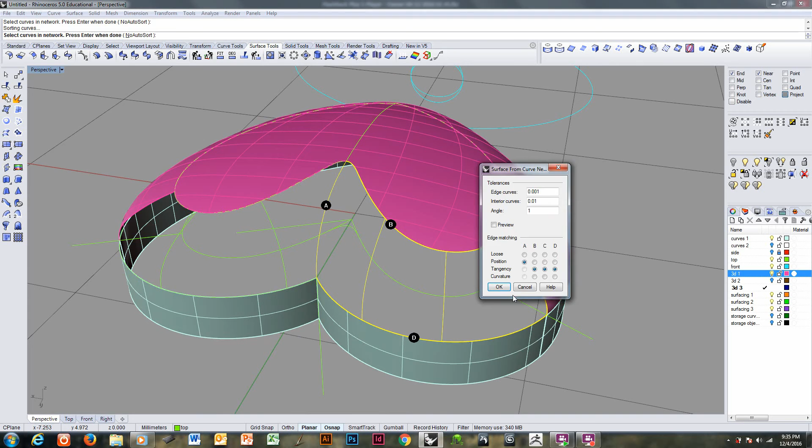You have a little bit of buckling right here, but that's just to transition between smooth and creased. I don't believe that's avoidable or really objectionable.

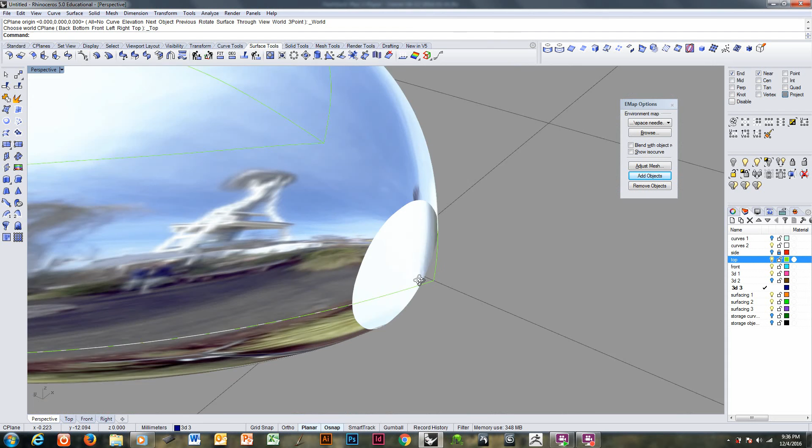So, methods that we have for surfacing this. We're going to extract the ISO curve.

Here, I'll just mirror it over when I'm ready. Curve extend by arc to point, without project on.

Explode, because I only want the section, and mirror.

And now to surface. We can try surface from curve network and see what we get.

But our challenge here is going to be that it's going to be a three-sided adventure. So...

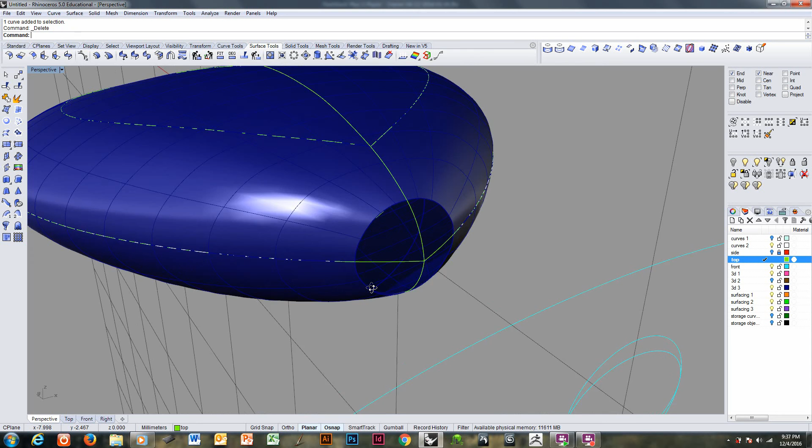Actually I need these to be split out, so before I do anything, borrow the join and join this, split these two curves, because I need cross-section information that goes through here, throw that away so I don't get confused. So I'm going to try...

I suspect it won't work, because I'm going to go to a sweep one rail. I'm exploring, to see what that gives me. Okay.

I really think my best option here might be a patch. This is all trying to keep the point there.

Unfortunately, patch doesn't allow me to keep a point. And this is going to fail. Yes, because it can't tell the directionality of what's going on.

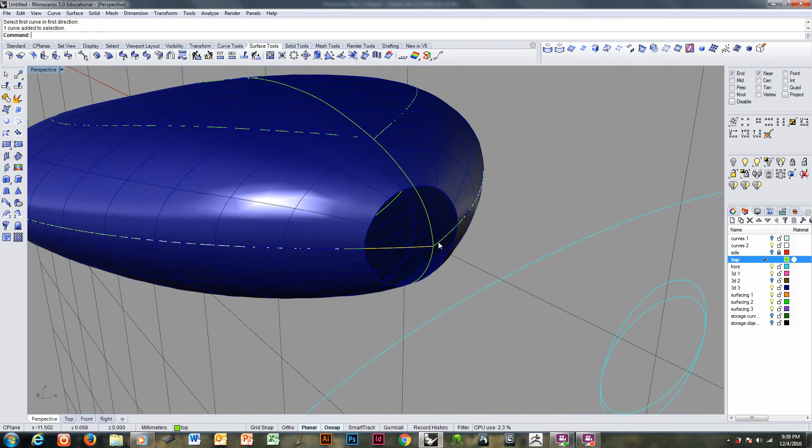Okay, I'm going to try and extrude these two straight down. And do surface from curve network. Edge, curve, edge.

But you can see the challenge is going to be, it's going to want to ripple right there at the bottom. Yeah, pulling that point is a challenge. And it will, I mean, it's there, but it's not very nice.

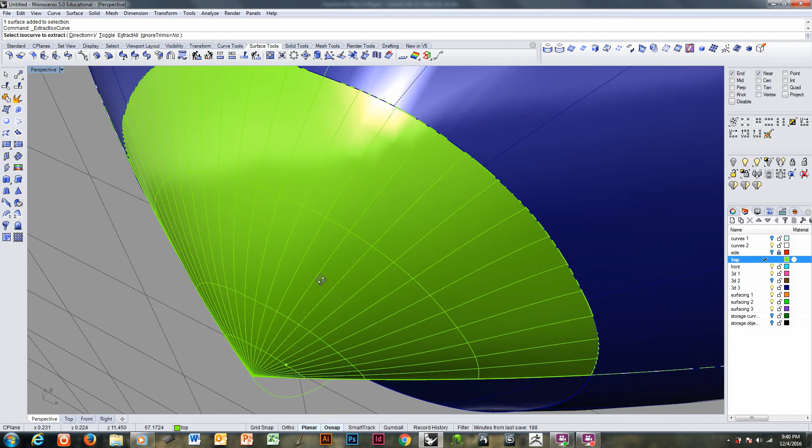I'm going to let go of that point by extracting an isocurve, looking to see where that rippling begins, stopping just shy of it. You see me do this in other videos where I just trim off the offending end there.

Mirror. But you can see I'm getting a pucker, a really unfortunate puckering. So that's not acceptable to me.

So, try patch once more. With these two smooth curves.

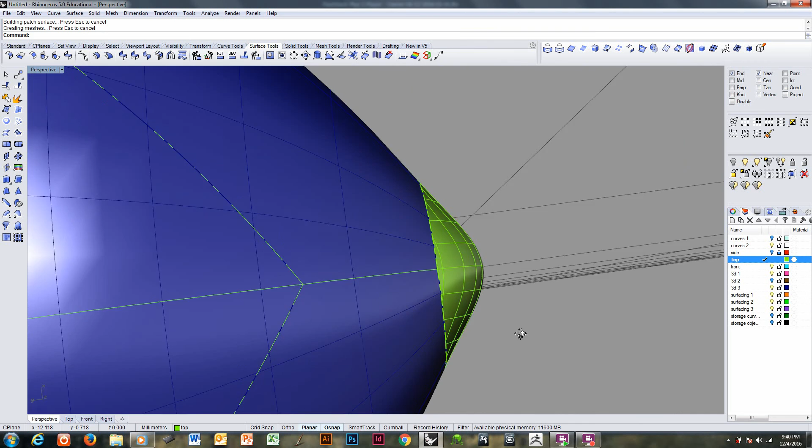And that gives me a fairly acceptable result. I don't care for that.

So I'm going to go ahead and let this round. It really does save a lot of trouble. Much.

But I will let it round some. Split it in the middle. And then re-extend this curve so it comes down and catches this new end.

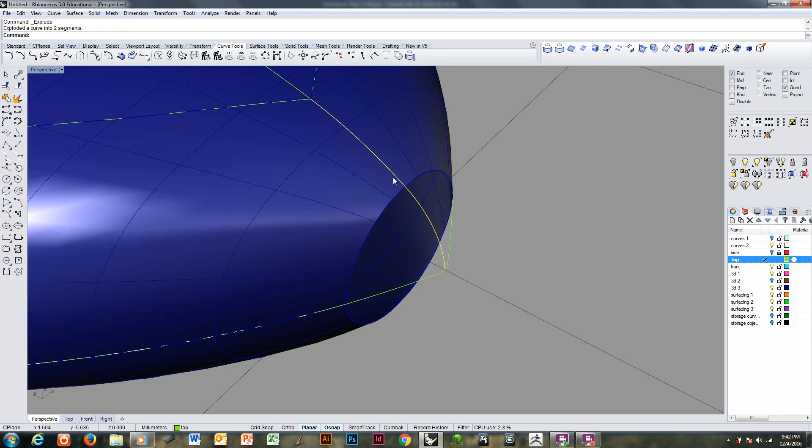Explode, I only want the piece that I extended. Mirror. And do patch again.

Curve, curve, curve, curve. Patch is having a very difficult time solving this problem. It's unfortunate because it was a good idea.

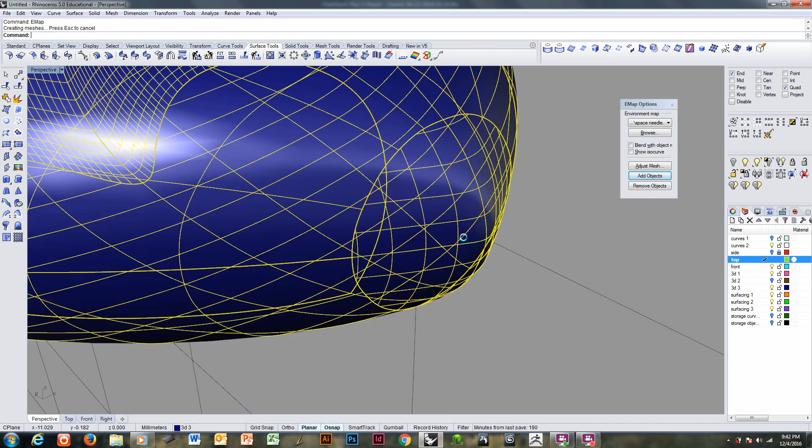I'll see if I can trim it out. Join it in and see what I have. That's nice. That works fine.

Okay, so there we go. A rather successful puffed part in Rhino.